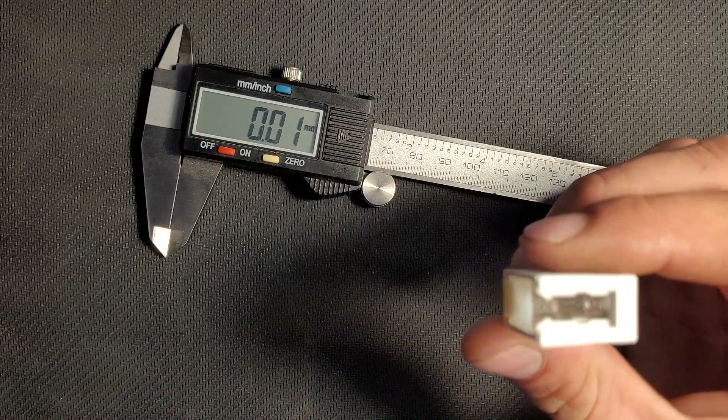To get started, one of the things you'll need is a set of calipers. Super useful tool. Anytime you do any real world modeling, you'll definitely need a set of these if you're not using a 3D scanner. The other component we're going to need is the light. For those of you who don't know, this is a small electronic bulb for the inside of a control panel on a washing machine. All this does is illuminate the light when the door is locked.

And the little lens that goes in this little hole here is actually what secures all of this to the front of the control panel. So without this lens, this little light just moves around in there, doesn't stay in place, and you don't know when the door is locked. So what we're going to have to do is model a lens that fits in the diameter of that circular shape down in there.

And the way this is going to work is this lens has to be pretty tight tolerance to that circle there. And what's going to happen is it's just going to slide up this channel and snap into place. And all of this has just a little bit of flex to it, so we don't have to worry if our tolerance isn't super close. So stick that into there like that.

And you know what I'll do for you? Bump this back up. All right. So you can really see what I'm doing.

Excuse my crusty hands. Today was a work day for me. If you're curious, I'm an appliance technician by day and a 3D printing technician by night.

So what I'm doing is I've got my tool inserted and I'm just kind of rotating it a little just to be sure I've got the tightest measurement against those two gaps in there. And really that's the only measurement we'll need for right now. So let's take a look at that. I'm looking at about 6.55. We can do 6.6, so it's a little tight.

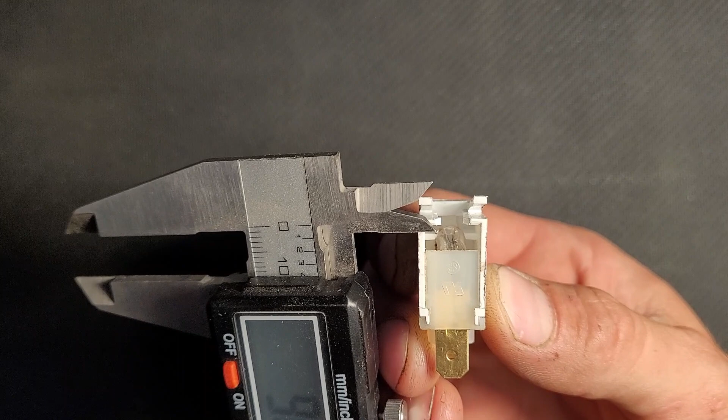So the next thing we're going to have to do is figure out the depth that we'd like here. And the way I'm going to do that is I'm just going to eyeball about 1 millimeter below this little lip down here. So we're going to go about there.

Yeah, that's good. And what we're doing is we're going to measure the length of the light from where it hooks in to the control panel. It has to pass through a piece of metal. And these two tabs are what secure the light in place. So we need to be just barely below that and barely above it. So we're looking at 8 millimeters total.

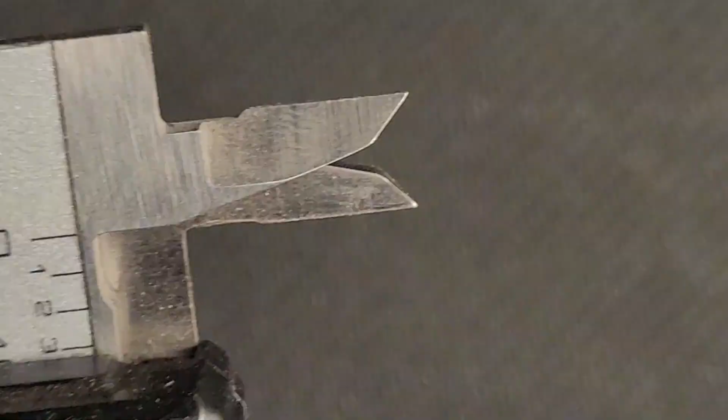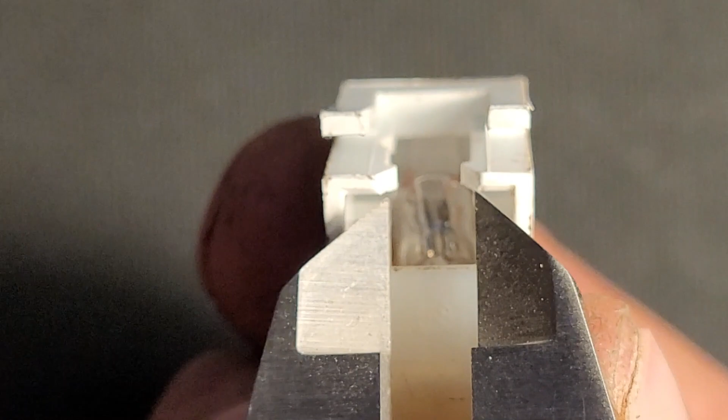So the last thing we're going to want to do is we're going to look inside of here and we're going to determine the width of the lip we'd like. And this is kind of the hard way.

What we can do using the software is just add 1 millimeter diameter to the sketch of the bottom of our cylinder we make for our body. So let's get to modeling.

So the software I'm using is Shapr3D. I haven't decided if I'm going to go with Fusion 360, Shapr3D, SolidWorks. There's a couple others. I want to do some more testing with all of them to decide if there's one I like more than the others. Shapr I like just because it's simple, it's easy, and it's nice to look at.

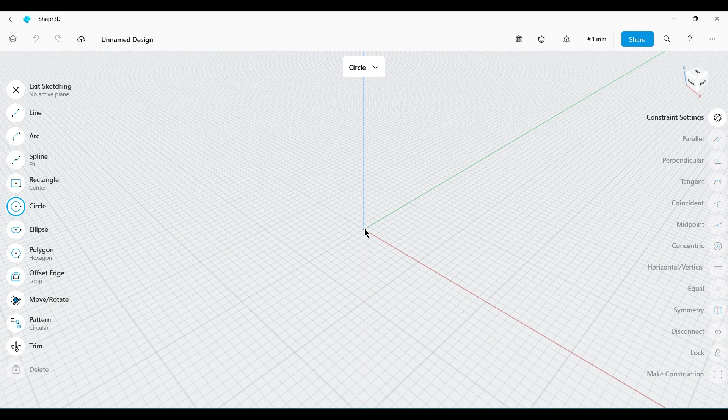So where we're going to start is with our first dimension. And make this easy on ourselves. Dead center top. Start with a circle. We're going to go 6.6 millimeters in diameter. Let's extrude this 8 millimeters.

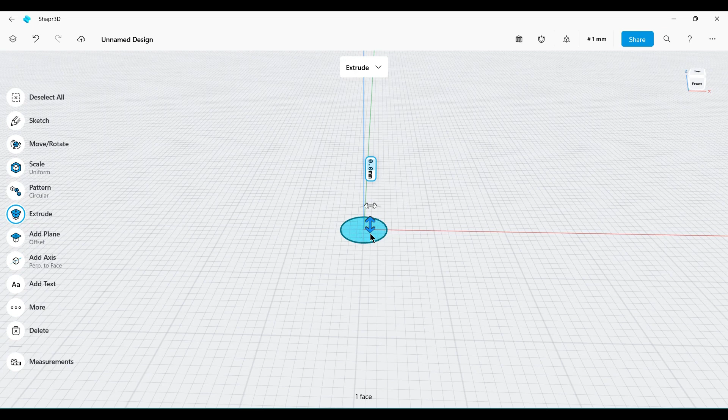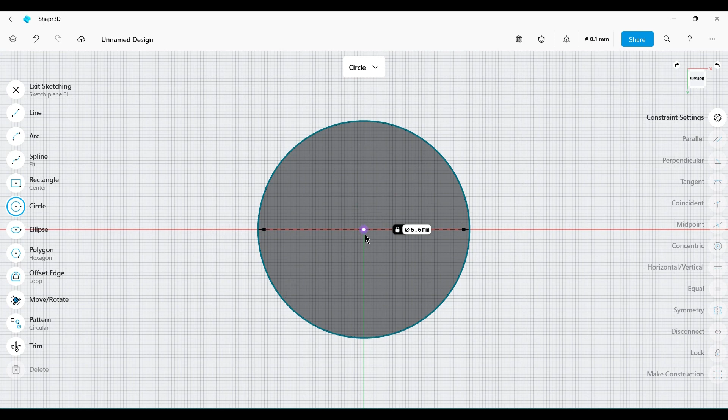And let's add our securing tab. And like I said earlier, we're just going to do this the easy way. We're going to use a circle. This diameter is 6.6. And we're going to go 7.6. Yep, just like that. Sick. Okay.

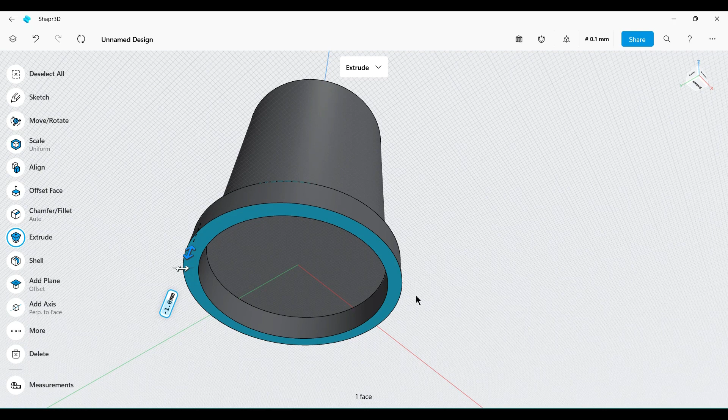Exit sketch. Grab your ring. And this only needs to be 1 millimeter thick. That's enough to hold it. Right now I'm trying to decide if we want to add a millimeter in depth or if we want to slide this inner cylinder down to meet this and then unionize the two components. I'm just going to add the extra millimeter. There ain't going to be no problem with that. And we'll just pull this down to be flush. Cool.

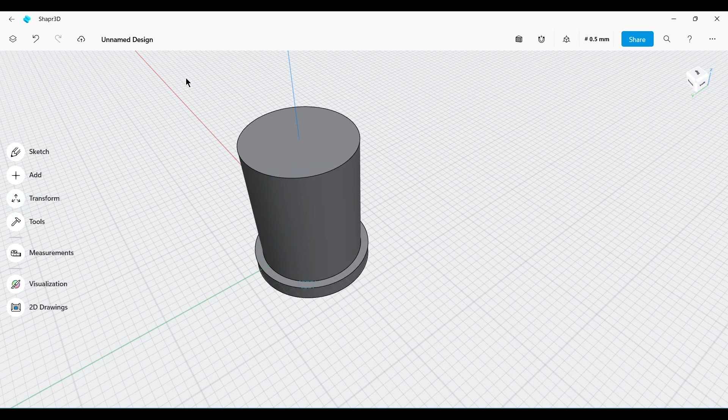And I like to just get this out of the way early. Control A. Start typing union. And join those parts just so I don't forget. I've sliced so many files where I find little pieces of little triangles, rectangles, circles laying off to the side when I hit arrange parts.

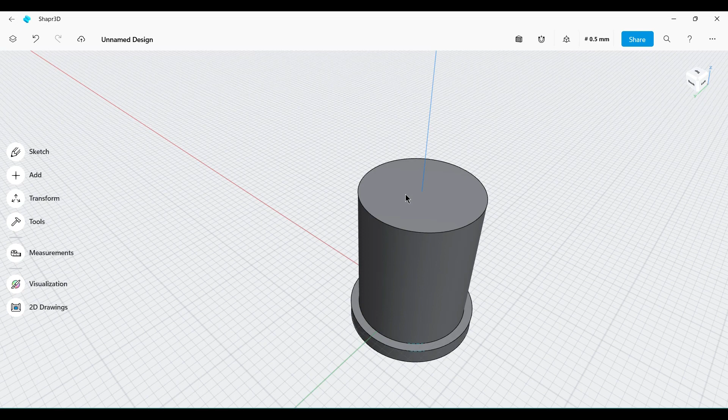So the final feature we need on this, we're really almost done, is the lip across the top that secures this to the control panel. So the way this works is this lens goes in through the front, and this lip rests on the metal of the control panel, and then the light I showed you earlier hooks onto this lens from the back, and that's how all this stays in place. So now we're going to do this, add another sketch, take a peek at my notes.

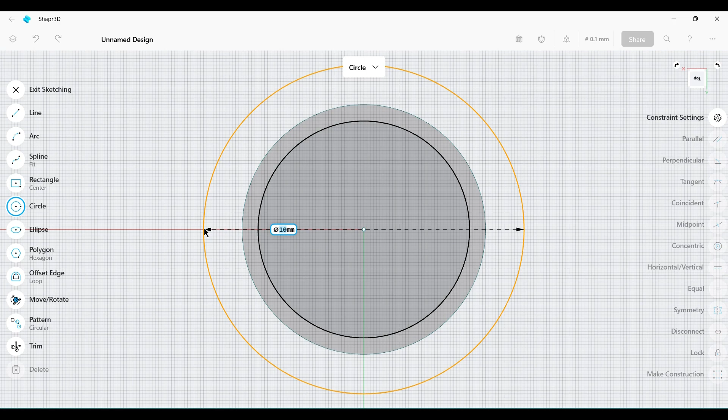Circle. And we're going to go with a nice, this is just aesthetics now, this lip. Part of it secures it in place. The rest of it is just for how much of a bezel it has around the hole. We're just going to go with a nice round 10. Peek at my calipers just so I could kind of eyeball what that looks like.

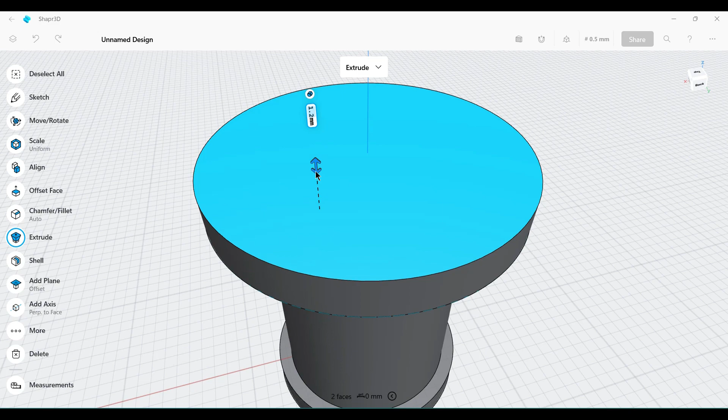To do this, now I'm going to make sure I select this outer surface and the inner surface of this other cylinder. I'd like this to be flush across the top. Extrude this. I want this just a hair shorter. We're going to take this to 3. Take this surface down to 10.

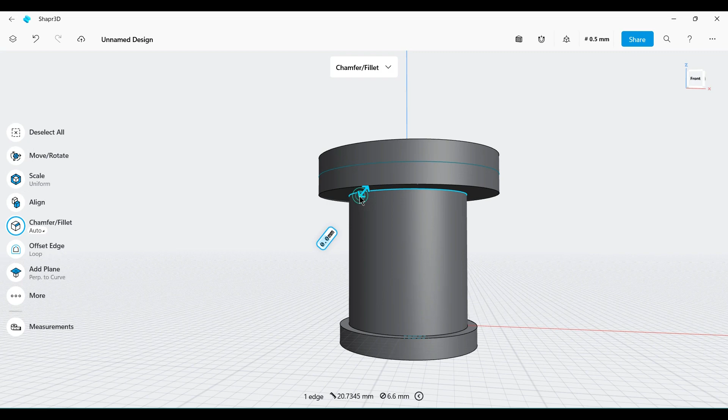To make this nice, and just so the light doesn't move around, I like 0.5. This one doesn't really need it. This one I actually wouldn't do it on just because it may cause the light to pop loose from the lens easier.

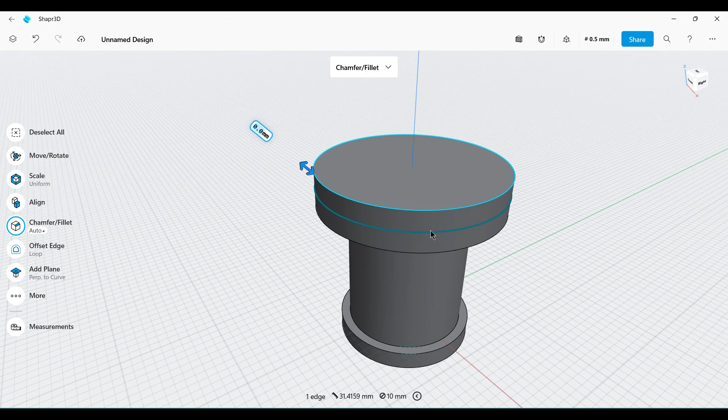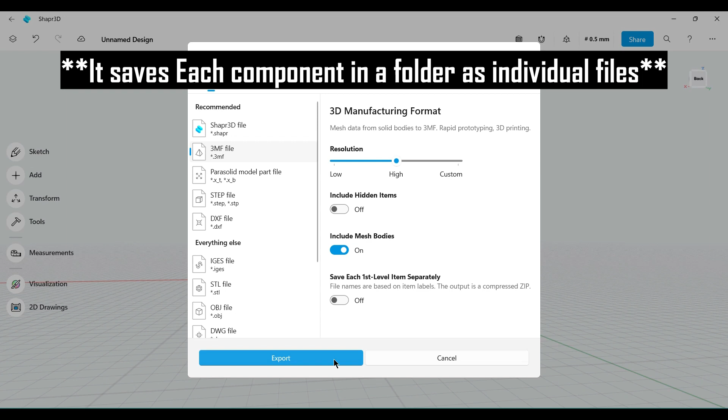So the way I prefer to export files out of Shapr is doing them as a 3MF. And if you have multiple components, I always check this box. That way it saves them each individually as individual components in a folder, instead of each individual component being in the same file. So that's one thing I really like. Export this as RAD Factory lens. Sick.

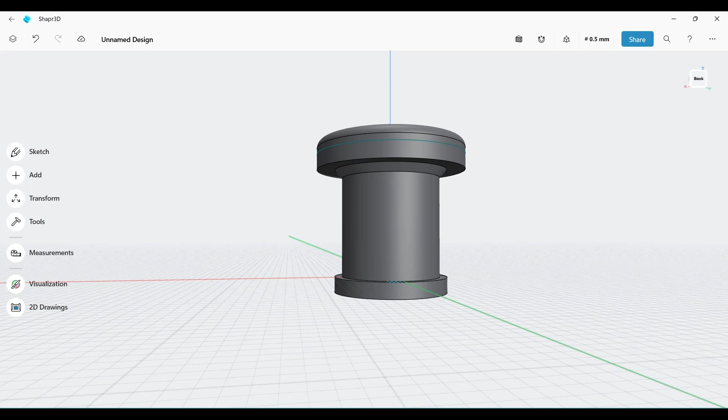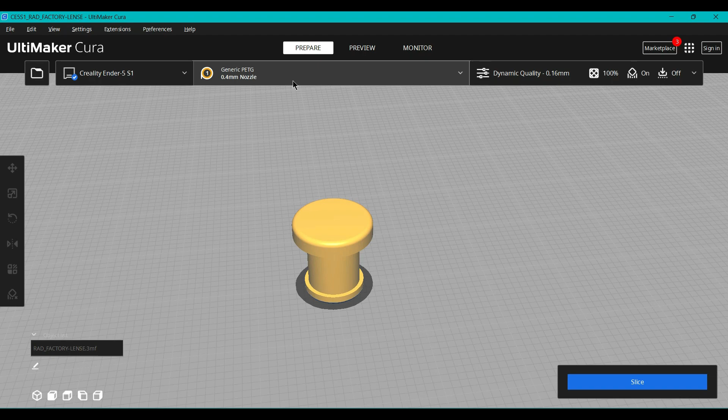All right, pop over to Cura, File, Open Files, RAD Factory lens. Arrange all models. Go over to Prepare. Sick. There we are. Our light. Lens, excuse me. So, like I said before, generic PETG profile in Cura.

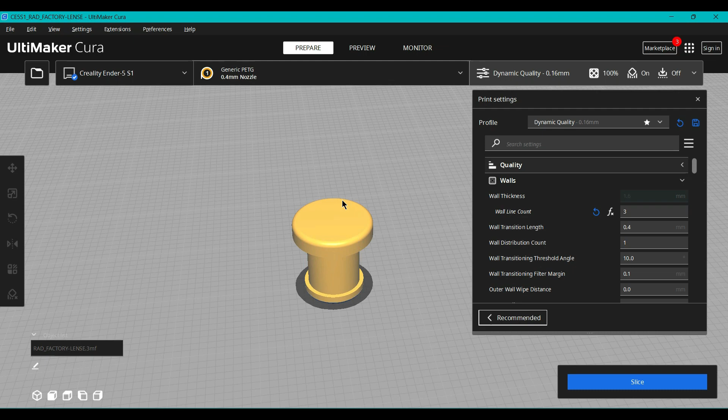The settings I've changed in here are I reduced the wall count. I also increased the flow rate. So all those little gaps in the infill will hopefully be taken up by that increased flow rate and the lower speed. So I'm trying to get as thin a walls as I can without compromising surface quality.

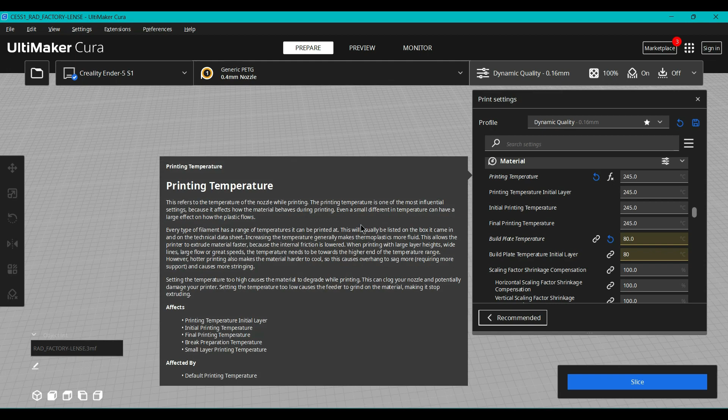Don't think I altered any top bottom settings. Infill, put to 100% lines. It's always best. Defaults to lines there, so you don't have to change anything else. Material printing temperature, I tend to go a little hotter for clear PETG if you're trying to get that really transparent clarity on it. Of course, the higher you go on temp, you start getting those funky abnormalities. So just be aware of that when you start increasing your temp.

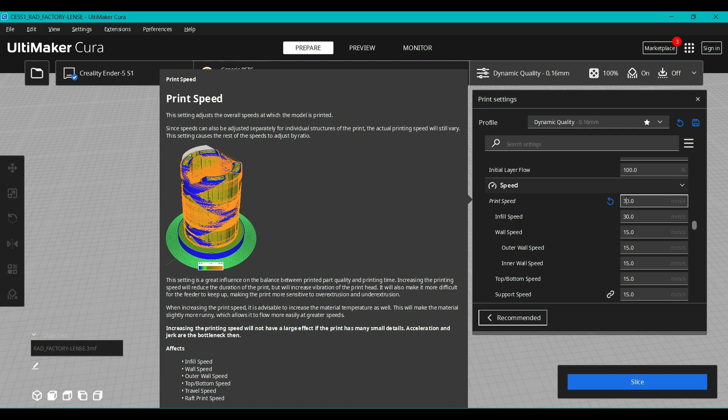Flow, like I said earlier, I do at 102%, just so it gets all those little tiny voids filled up nicely. Printing speed, I printed my first test at 30. I feel like it maybe was a little too fast, but I'm concerned my extruder won't be able to extrude properly at these speeds below 15. So I'm going to leave it there.

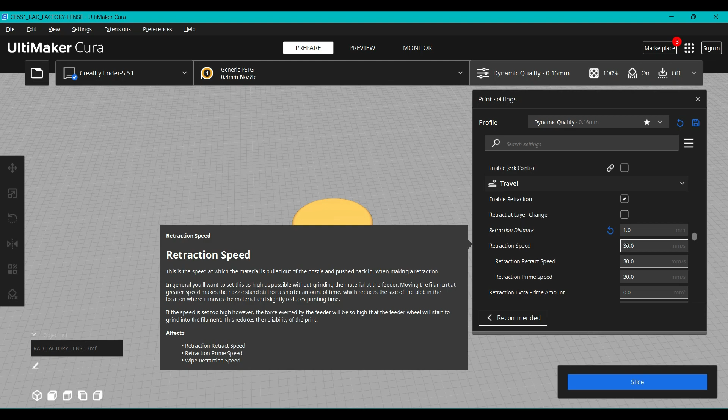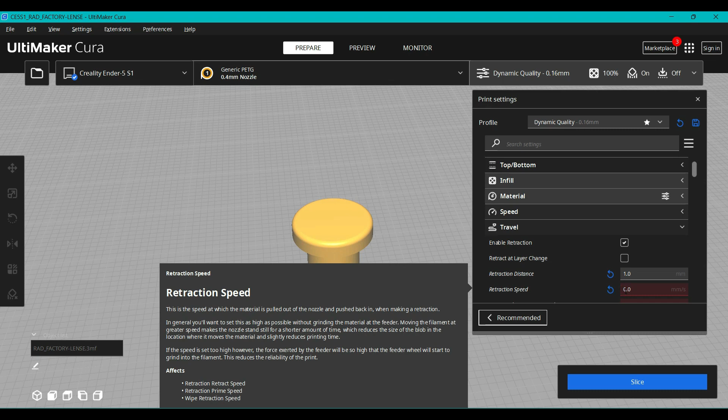And I always like a nice round 1mm retraction and a nice good 30, but I'm actually going to bump this down to 25 because I saw a few, what happened here? I saw a few strange things, little marks that I kind of didn't like on my first test, and I think maybe because my retraction speed was a little too fast. Number lock, 25. We're going to go with that.

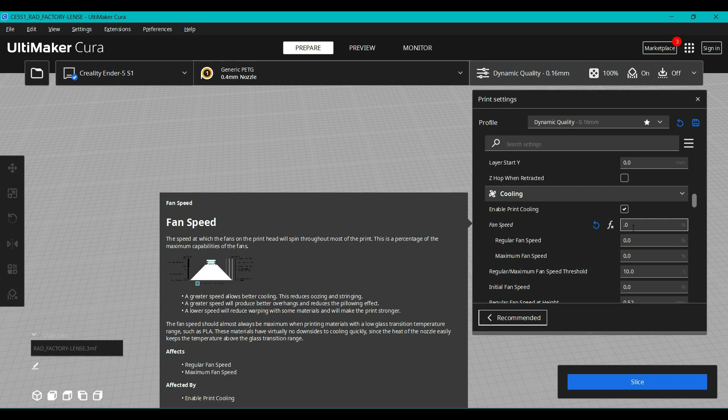Combing mode within infill, just so there's the least amount of abnormalities on the surface. Won't really affect the top, but I always like it. You know, cleanest outer surface you can get. Cooling, I always set this to 30 for PETG. I'm not 100% sure why it's not that. Maybe that's some of the abnormalities of my first test too.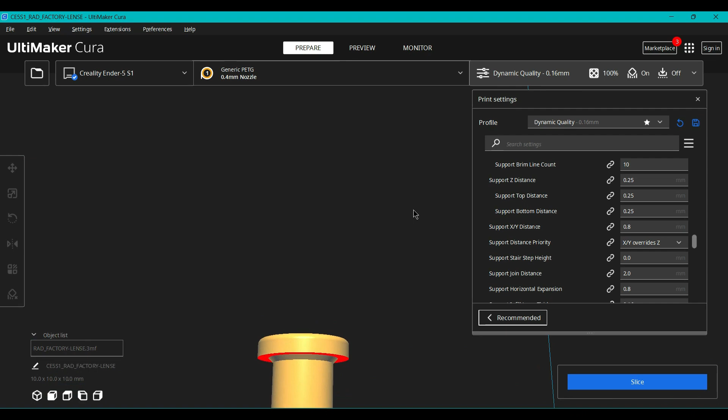Generate supports, normal settings are fine. I generally like a support angle of about 50 with PETG. This is pretty much a 90-degree angle, so that's kind of irrelevant. Remove mesh intersection, just in case I've got any weird things with how I put this top piece on the main cylinder.

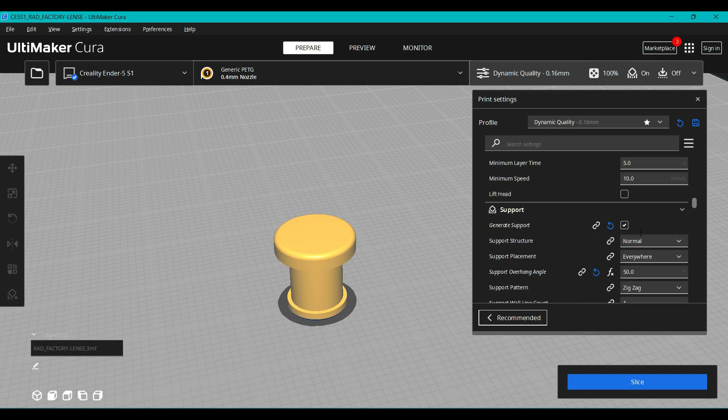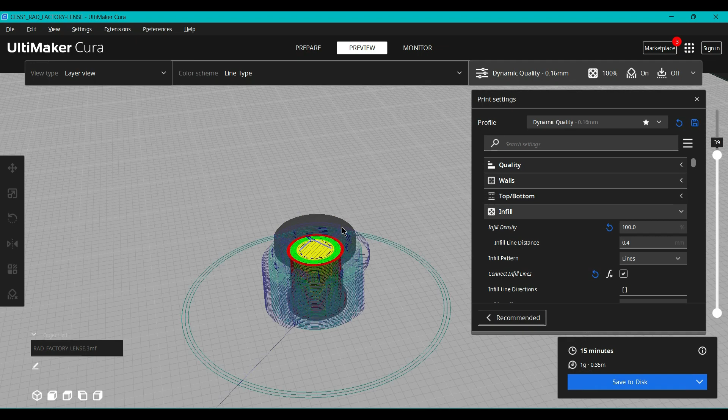I guess nothing in here, but one thing I know I set that I didn't tell you about in infill was connect infill lines, just so there's the least amount of extrusions, the least amount of possibility for voids and small holes in the part. Set slice, take a look at it. 15 minutes, sick, 1 gram. That looks okay. All right. And now we're sliced, and now we're ready to send it off to the printer and see what we get here in about 20 minutes.